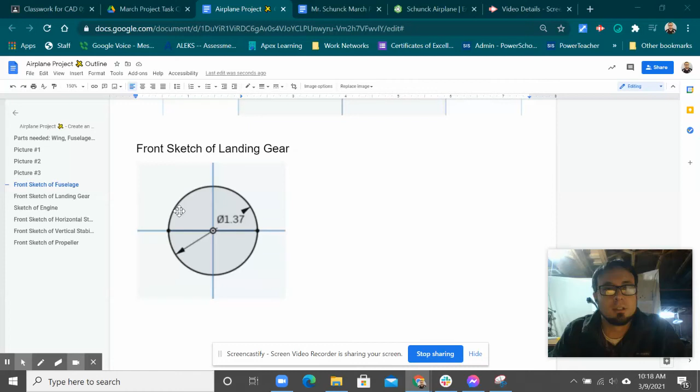Right, next what we're going to do is the landing gear. So if we look back at the picture of the airplane, it's basically just a semicircle extruded. So from the front view of the airplane, we can see it looks a little off. That's because of the angle of the camera, and it's a little not positioned correctly, but it is the same width as the actual

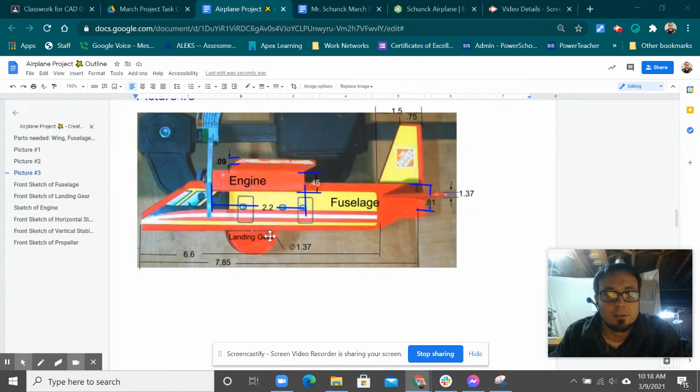fuselage. So that'll be the extruded value of 0.73. We're going to draw a circle, cut it in half, and then just extrude the half of it. The diameter of the circle is 1.37.

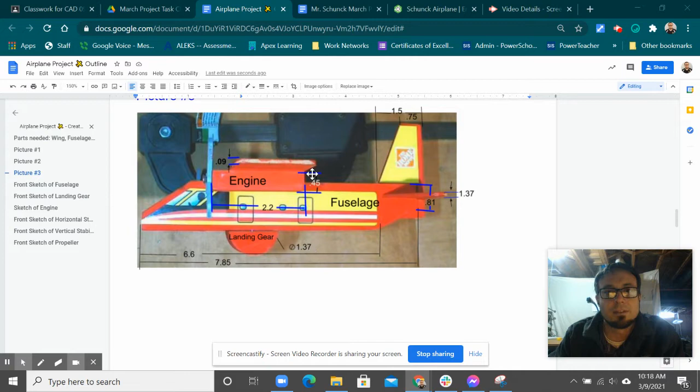So let's go in here, and as usual, we go to plus at the bottom, create part studio, and then I'm going to right click and rename it. And I'm going to call this one landing gear. Or alt click if you need to do that.

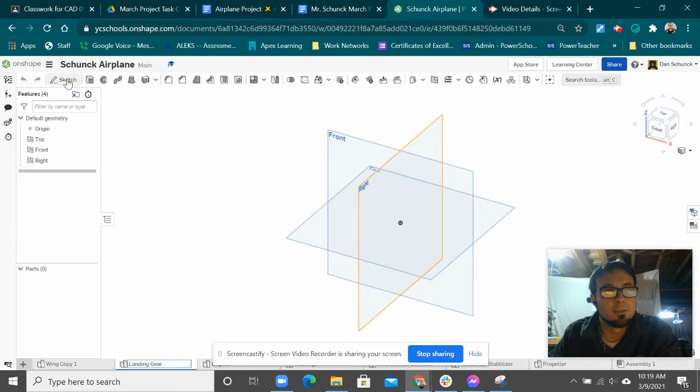And then what I'm going to do is do a sketch, front view. I always like doing the front view, most detail, which is the half circle. But I'm going to start by making a full circle. There's a couple ways to make circles. You can use 3 points, ellipse. Center circle is probably the best.

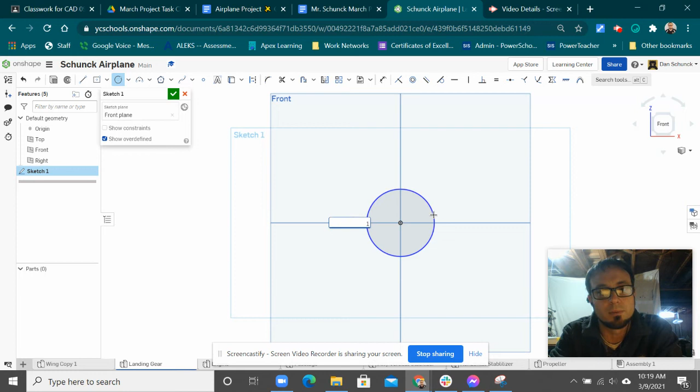And what I'm going to do is click at the origin, and I accidentally unselected it, and make that there. So once you click once for the center point, click again for the outside point, and then we can actually type in 1.37. And then what we want to do is we want to cut that circle in half.

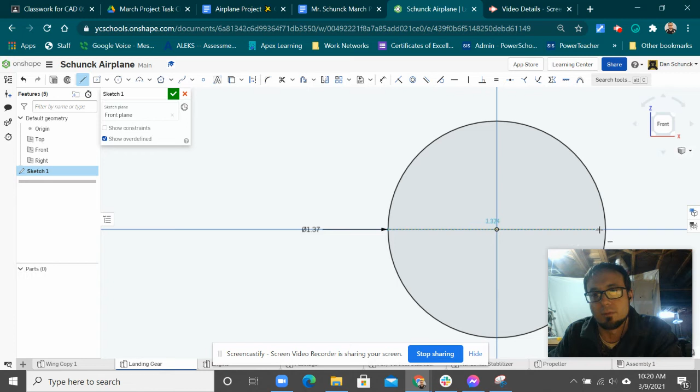So I'm going to go to my line tool. I'm going to try to go across the axes here. So see how it kind of snaps to that. One click, then we go all the way across through the center of the circle, and then the other side, and it's right across the diameter. So then we can right click, escape, or you can escape by clicking that again.

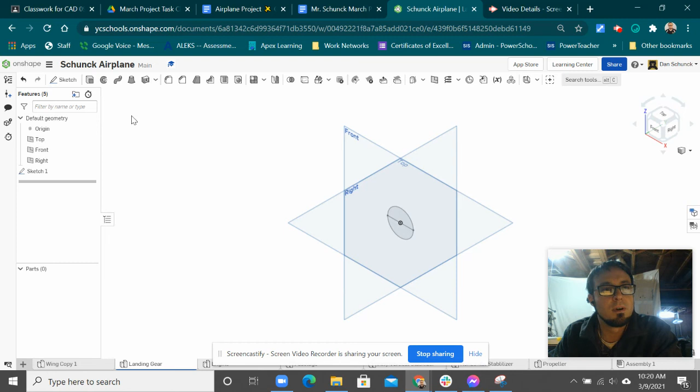So we can keep the sketch of the whole circle, and then close that out, as I like to do, move to the isometric view, and then we're going to extrude. And we could click on the bottom and the top, but we just want to do the bottom. So whenever you do pieces, just click on all the pieces you want to extrude. And 0.73, I think was what it was.

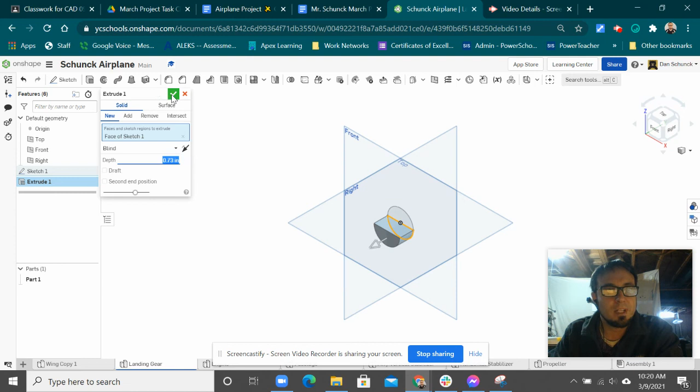And click check. Go to part, right click or alt click, edit appearance. And I'm making mine red, I guess, like the rest. Unless I decide I want to make it black, kind of like a tire. I don't know. I might do this version black. Doesn't matter. All right, there we go. That is our landing gear.